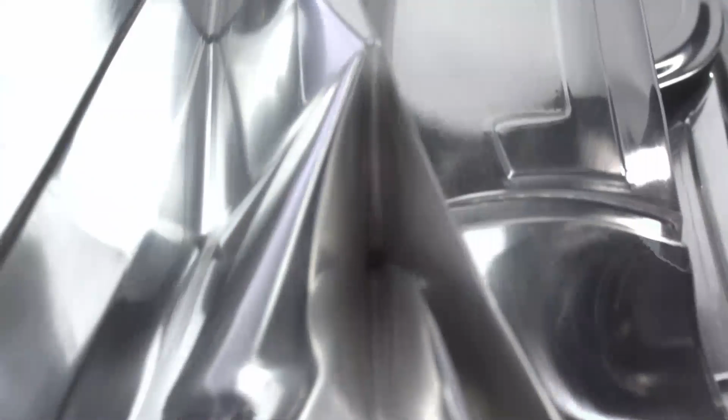So why PowerMill? Why PowerMill over everything else? Dedicated, expert, and trusted. It is a dedicated CAM system, it is not a CAD system built into it, it is specifically designed to do CAM. It has been around for more than 20 years, and it is industry recognized as one of the solutions to produce fantastic quality parts.

So what can we do with PowerMill? The first thing, high-speed roughing operations. I'm going to show you through this a little bit later on. But one of the most interesting aspects of this is called vortex roughing. This aims to basically keep a constant load on the tool, allowing us to increase tool life while reducing cycle times. Really, really interesting piece of kit. I'm going to give you a bit of a demonstration of that later on.

Can also do 2D milling, which covers feature detection again, which I will demonstrate later on, drilling, pocketing, and chamfering. So we really have a wide range of 2D milling operations.

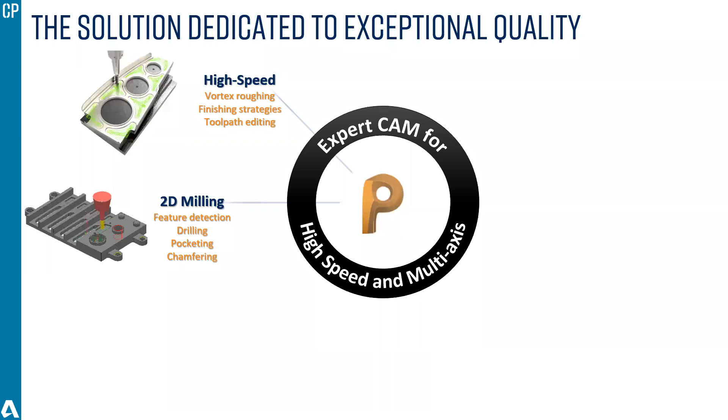On top of that, we have 3+2 machining. Very, very useful for reducing tool push off, just a full utilization of a full 5-axis machine.

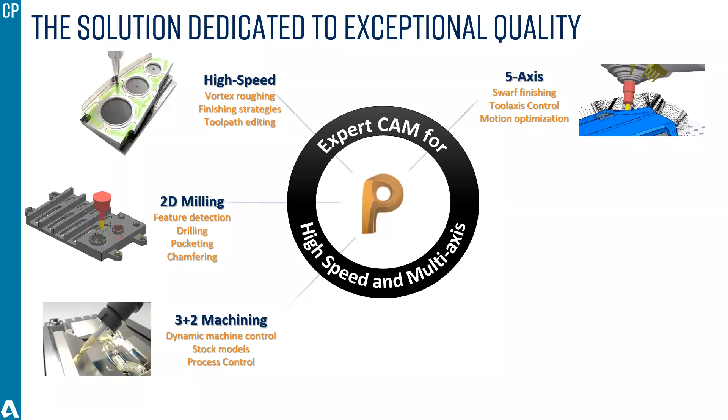We also have full 5-axis simultaneous commands, including swarf finishing. We also have tool axis control, which is a really, really interesting part of the system. It actually allows us to dynamically change the orientation of the tool to prevent any clashes, etc.

Mill turn, we're going to leave that one for today. We do have the ability to do mill turn within PowerMill, but as I said, for today we're going to focus just on the milling.

And also robotics. So we have the ability to program a wide variety of robots, a really, really interesting part of the system. Again, for today, we're just going to focus on milling, but if you'd like any more information on that, I'd be more than happy to walk you through it.

So what impact does PowerMill have? Improved quality. This is, I'd say, the main focus of PowerMill, producing high quality parts to really tight tolerances. We do this in a number of ways by having a large number of finishing strategies, which allows us to not have the need to do manual polishing after the fact. Also allows us to meet delivery schedules by allowing efficient programming of parts and improve throughput, maximizing capacity.

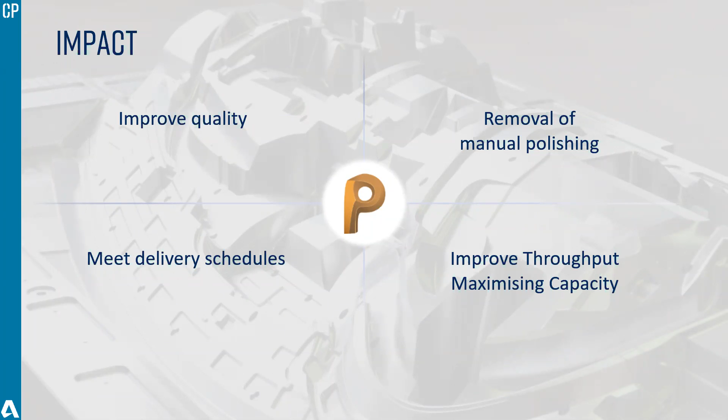Expert levels of control and optimization. Okay, so we touched on this a little bit before. Increased precision, as I said, we'll give you a good demonstration of what that means later on. Excellent surface finish again. Greater efficiency is really about creating an incredibly efficient program very quickly.

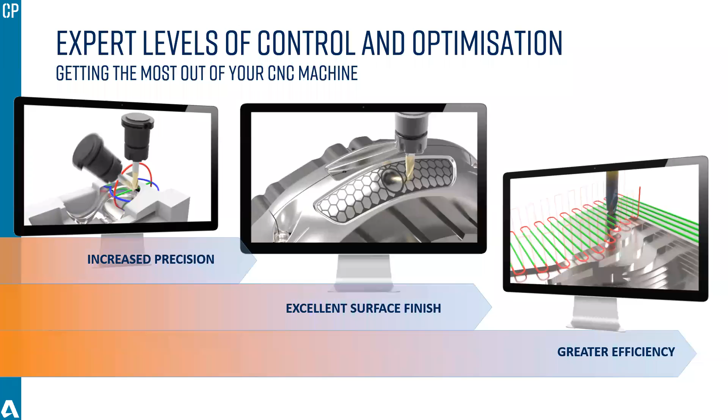So again, we come back to impact. Greater control and flexibility to reduce the cycle times, repeatability and standardization. So this is something that allows us to automate repetitive tasks. So an example of this would be our tool library. So instead of creating tools on every occasion, we can simply create a library and import them as necessary.

Maximize return on investment of CNC machinery. Again, this really comes back to getting the very most out of the machinery that you have by using an efficient CAM system. Trusted to deliver. Now, as I said, PowerMill has been around for more than 20 years. It is an industry-proven piece of software.

So how do we produce these efficient results? Well, one is by stock simulation. So what this allows us to do is to produce accurate representations of machine stock at any point in the machining process, simulate the effects of feed, speed, tool geometry, and the number of teeth on your machine parts, identify hazardous machine motion that could degrade surface finish, and highlight regions of stock where additional machining needs to take place.

Okay, so I'll give you a bit of a demonstration of that last one a little bit later on, where we can actually take a model that we've already machined and run assessment on it to see if there are any gouges on the model or potentially if there's any material left over.

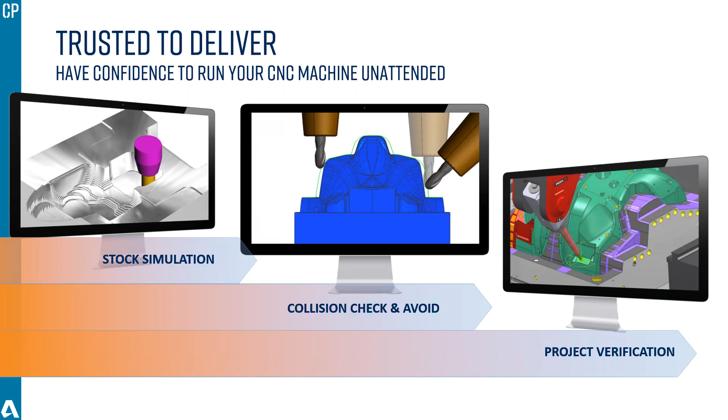So what are the benefits of using PowerMill? Well, increased confidence. So we touched on that in the last slide. The PowerMill verification tool to confirm toolpath and NC program are safe to use. Major problems can be identified and fixed early in the programming process, ensuring that programs are ready for use on your 3 or 5-axis machines.

In many cases, programs are of such high quality that they can just be run on the machine unattended. Okay, so this basically involves you can start the machine when you go home at night, run it overnight, and when you come back, the part's finished in the morning.

So what does this lead us to? Well, better use of our workforce. Machine operators are not stood watching the machine. While one part is being machined, they can be programming the next one. The workforce can also supervise multiple machines or redeploy to focus on other tasks. Leaving the CNC machine doing what it does best, producing great parts. Feeding a machine with high quality NC programs ensures that you always produce the best quality parts.

Protecting hardware investment. Now, I'm sure this is the one that everyone is pretty keen to talk about. Obviously, modern CNC machines are incredibly complex and expensive pieces of equipment. A single machine collision can run into thousands of dollars worth of downtime and repair bills. So it's really important that every program that we send out to the machine, we know is going to produce exactly that part without problems.

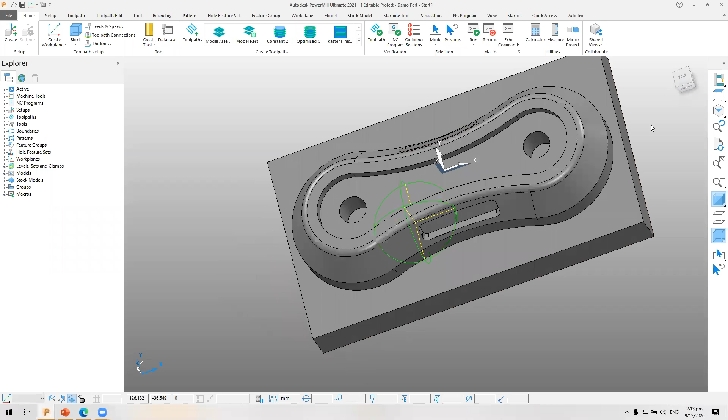Okay, so to start with, just a very quick overview of where everything is in the system. Obviously in the center we have our part window, which we can manipulate around. So we can hold our middle mouse button and drag anything around that we want. Over on the right hand side, we also have a number of shortcuts. This is usually used to manipulate the view and what we see on the screen.

Over on the left hand side, we have our Explorer. Now this is going to be where all of our NC code, all of our toolpaths and all of our tools that we've created are going to be listed. Obviously, we haven't got a lot in here at the moment because we haven't started. And up at the top is our taskbar. So this is where we access all the different features of PowerMill. If I can get that to go away again.

Okay, so the first step whenever we open up a new part in PowerMill is always to produce our stock. So I'm going to come up here and select block. Now this allows me to do a number of different things. So first of all, I could physically go in here and input the figures that I want for my stock. Not a problem at all.

But what I can actually do is I can hit calculate. And what it's then going to do is it's going to shrink that stock down to be the same size as our part. So at the moment, this is shrink wrapped exactly the size. So I'm going to come in here and I'm going to say add 2 millimeters on in the Z, just so that we've got something we can come in and face off. When I'm happy with that, close it down.

The next thing I'm going to do is come into my Toolpath Connections tab. Now this allows me to set up my clearance planes. So again, with PowerMill, the process is always the same. We create the stock, then we set up our safety planes before we do anything else. At the moment, by default, the system gives us a rapid clearance of 10 millimeters and a plunge clearance of 5. Now you can come in here and change this if you want, but for the moment, I'm just going to hit calculate.

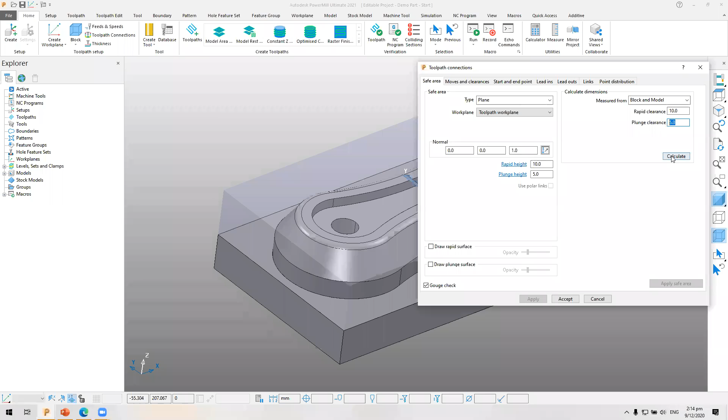I can then also turn on a visual representation, so I can actually see where those planes are going to be above the parts and make sure they're in the correct place. Once I'm happy with that, turn both of those off and close this down.

Okay, so what's next? Well, before I can produce any toolpaths, I'm going to have to create a tool. Now, there are a number of different ways of doing this. I can, if needs be, just come into here and create a tool from scratch, so literally input the dimensions as we go. But what we encourage people to do within PowerMill instead is to use our tool database. So I'm just going to click into here, let this load. Oh, and it's loaded on the other screen. Let me just drag this across.

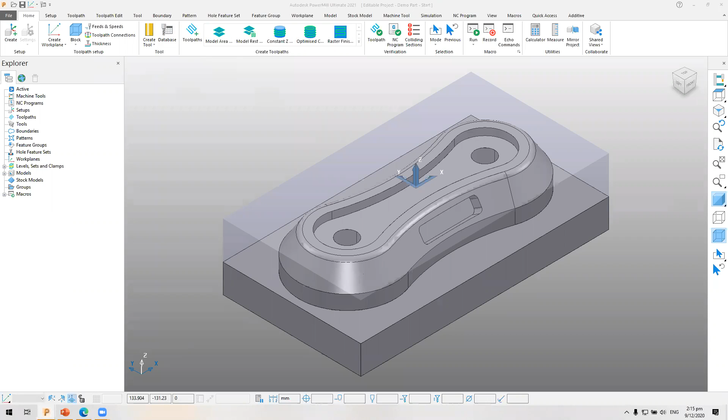So this is PowerMill's tool database. Now by default, I'm using just a generic tool group. So this is just something that ships with every version of PowerMill, and it's just a set of standard tools. But what you can do, and what I would certainly encourage, is for you to actually create your own tool libraries based on what you have in each machine.

So we're not limited to just one tool library. We can have a different tool library for each machine that we have in the shop, and it's really easy just to switch between them, so we always know what tools we have available to us.

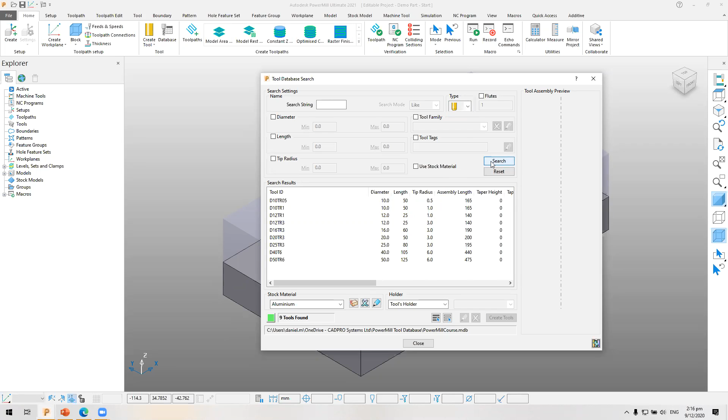So down here, we can see all of the different tools that are in this database currently. And up at the top here, we can see the section for type. So I can actually filter the database by the different types of tool. So I'm going to select tip radius tools, hit search, and then the system displays all of the different tip radius tools that we currently have in our library.

So I'm going to select the biggest tool to start with, a 50 mil, just to try and get rid of as much material as we can. Hit create tools. And now I'm going to close that down. And we can see that tool's been created there.

So the next thing I'm going to do, now I've got a tool, is I'm going to need to create a new toolpath. So again, up here on my taskbar, I'm going to select toolpaths. It's always going to put it on the other screen. And that displays our strategy selector.

So we see a similar form here to what we see with our Explorer over on the left-hand side. We have a number of different groups of strategies. Okay, so we have, for example, 3D area clearance, curve machining, feature machining, or we can click through these and it shows all of the different strategies that we can employ. We do also have a search bar if needs be.

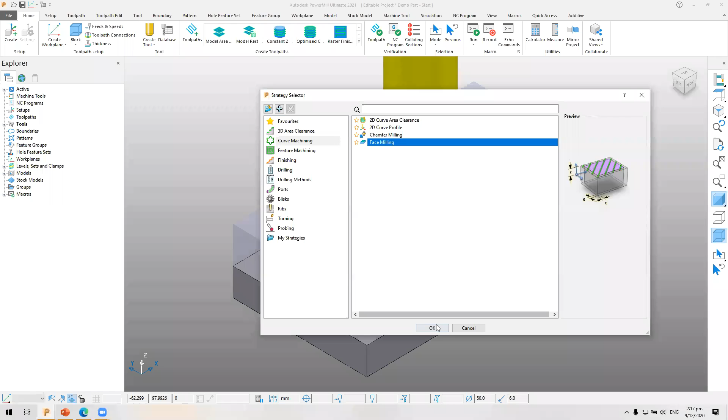As I mentioned earlier on, PowerMill has a huge array of different strategies that we can employ. So it's a really slick way of putting things into categories and makes it easier for us to find our way around. So what I'm going to do to start with, I'm going to select curve machining, and I'm going to pick this face milling operation. Press OK. Always on the other screen.

And now we get our toolpath window come up. So again, similar form to what we've already seen. Over on the left-hand side, we have an Explorer with different options that we can go through. And over on the right-hand side, we see whatever option we have selected in the Explorer, all the different options displayed there. So if I click through, you can see all the different options are displaying.

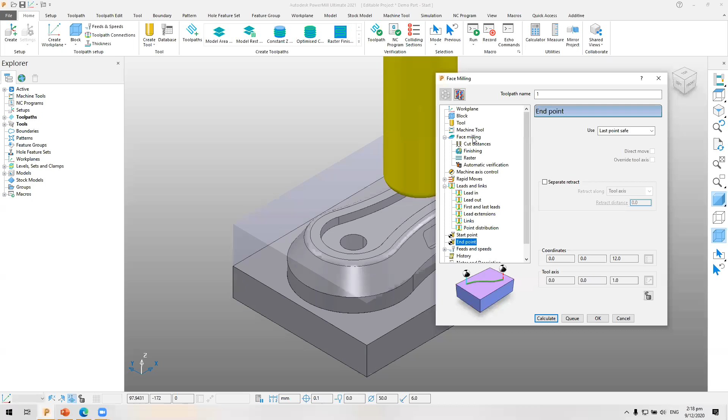Also up at the top here, we have the option to give this a toolpath name, which I thoroughly recommend and honestly very frequently forget to do. With simple parts, it's not so important, but when you get to very large, complex components, it makes life much easier if you've gone through and named everything. If you have the toolpaths named 1, 2, 3, 4, 5, 6, if you ever want to come back to it, it does become really difficult. So I'm going to name this top face.

Now we have the option here to pick where our face is going to be located. Now we've currently got it at 0, which is actually where our coordinate system is, as it's located on the top of the model, so that's okay. And I'm just going to come in here and change my step over to say 20 mil and press calculate. Close this down. So there we go. We have our first operation.

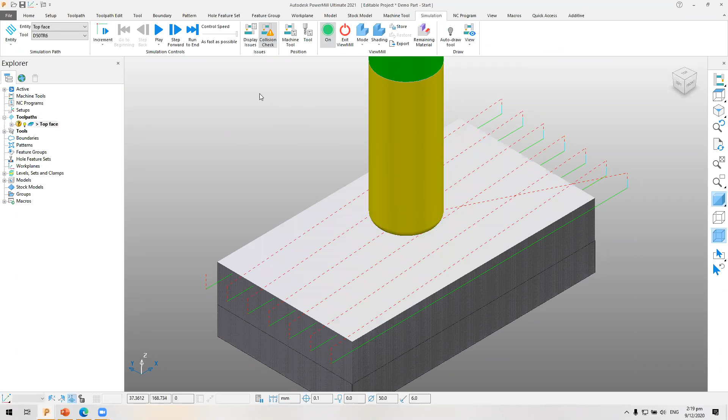So now that we've got our first op, what we want to do is simulate that. So under here on the toolpath, we can see the operation that we've just created. If I right click on there, press simulate from start, and the system then takes us into our simulation workspace. First thing I'm going to do is I'm going to turn on my ViewMill, which will allow us to see the stock that we've created. Now I'm going to just slow this down a little bit so we can see it. Press play, and there's our first operation.

So once I'm happy with that, I'm going to come up here to the taskbar. I'm going to press store. So what this allows us to do is literally save the simulation in its current state, so that when we produce additional operations, we don't have to watch through the ones that we've created every time. We can simply just come back to this point.

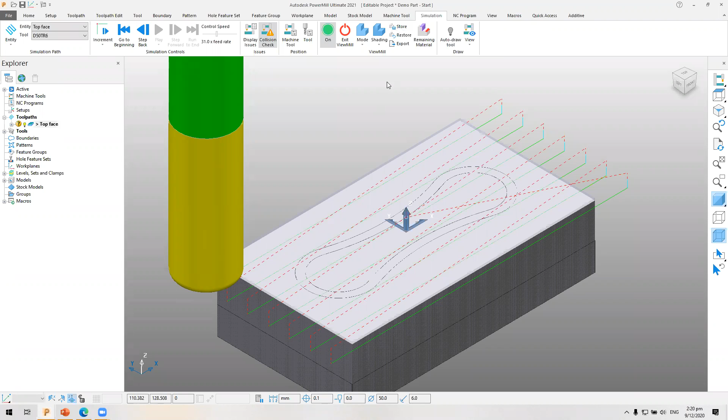I'm now going to say mode and select no image. So that's basically just going to hide away our stock so that we can see more clearly the next operation that we're trying to produce. So I'm just going to hide this toolpath away. It's not a necessary step. You can leave everything on the screen. It just makes life a little bit easier for us to see what we're doing.

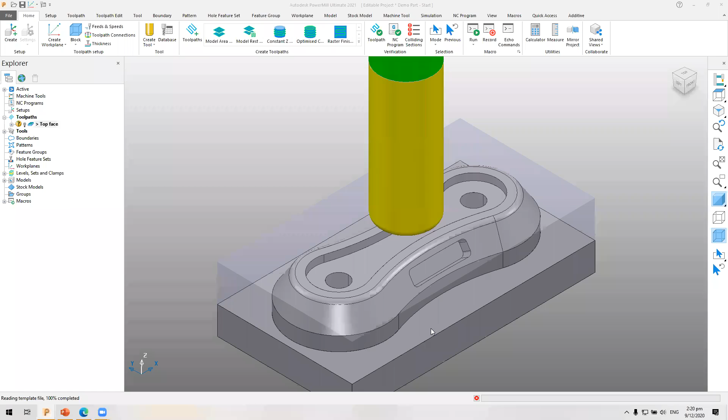So now it's time, next operation. So I'm going to come back to my home tab, select new toolpath. Again, I'm going to come into my 3D area clearance, and I'm going to select model area clearance. This is our standard kind of roughing operation, if you will. Press OK on that. Again, first thing I'm doing here, come in here and give this a name. So we'll call it

outside rough. We've got a number of different styles of roughing that we can do in here. So for the moment, I'm going to select offset model. Vortex I discussed very briefly earlier on, which is a high-speed milling operation, which I'll show you in a second. For the moment, though, I'm just going to select offset model.

I'm also going to leave a thickness on. Now, what this does, this is essentially stock to leave. So what I'm going to do is I'm going to leave 1 millimeter of stock on the walls, and I'm just going to finish the floors to depth. I'm being just a little bit crude just for the sake of speed in this one. Step over, I'm going to leave it 20 mil, and step down, I'm going to change that to 10. Now before I do this, I'm just going to come in here to my limits tab.

I'm just going to change a couple of things in here. So the first thing I want to show you in here is this block command. So by default, the tool is currently set so the center of the tool will never pass outside of the stock. But to get around this edge here, we're going to need it to drive around the outside. So I'm going to switch that.

I'm also going to set some Z limits here. So what I can do is I can actually specify between 2 points in Z where I want to machine between. I can input the figures if needs be, but a much slicker way of doing it is to actually select this icon here. And now I can actually pick that directly off the model. Do the same with my lower limit and press calculate.

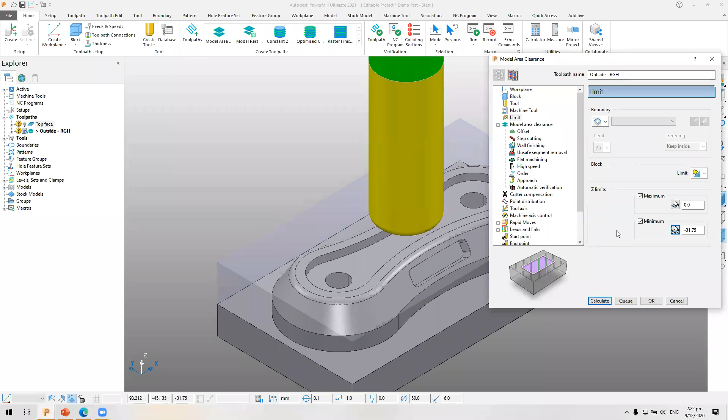Okay, so there we have our first roughing operation. So I'm just going to simulate that. So right click on the operation, simulate from start, turn my stock back on. I'll just speed this up a little bit and press play. Okay. So that looks pretty good.

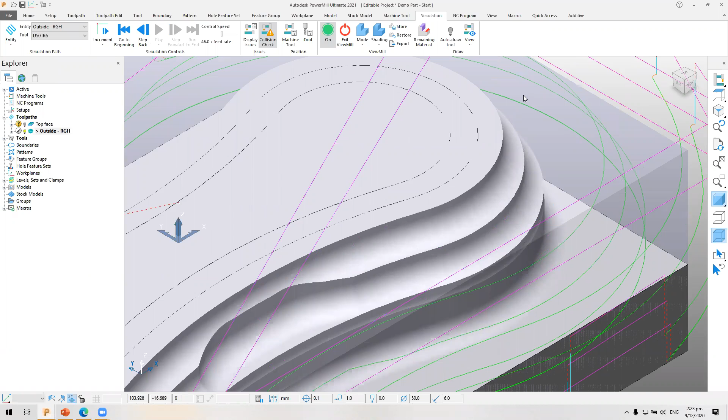One thing I do notice though is that we are leaving some fairly big scallops on these walls here. So before I come in and finish this, I'm really going to need to clean these up. So there's a number of different ways I could do this. I could produce another operation, essentially a semi-finishing op, in order to come in here and remove some of this material. But what I can actually do within PowerMill is actually build that logic into my roughing operation.

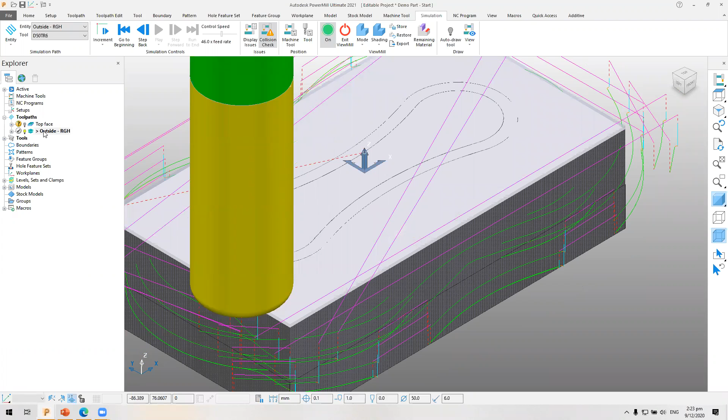So what I'm going to do, I'm going to hit restore. That's going to take my simulation back to the state it was before we ran this operation. And now I'm going to come back into this operation, press settings. Notice I don't have to leave my simulation workspace for this. I can edit everything on the fly. Going to let that load.

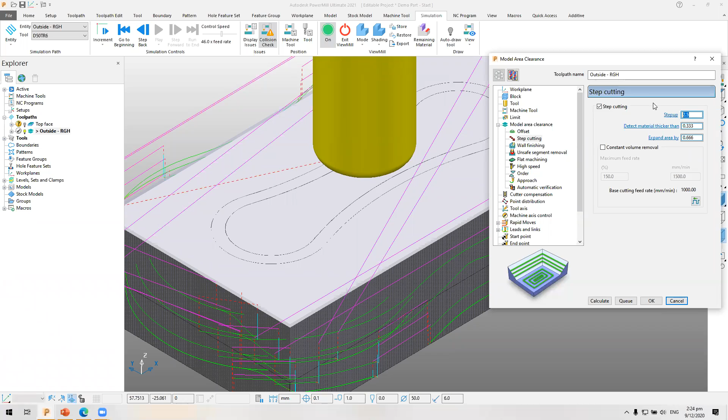And now under step cutting, I'm going to enable this. And what this is going to do is it's going to actually assess the model, and if needs be, it will then add additional passes in at the figure that we've specified, currently 2.5 mil, which is just going to help us to reduce those scallops. So essentially, we're going to be doing a roughing and a semi-finishing operation all in one here. Press calculate.

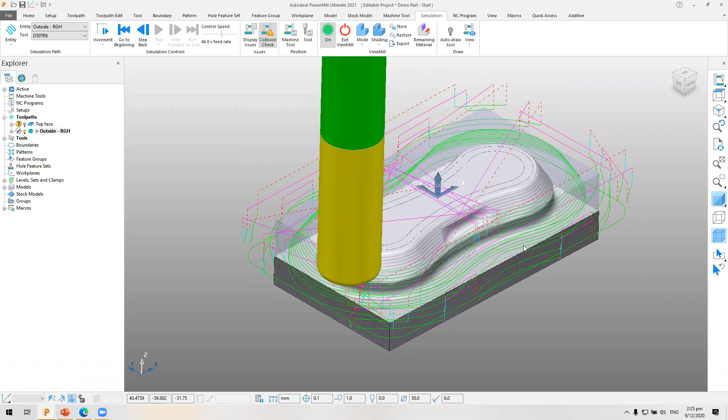Close that down. In fact, let me just hide this away just so you can see those. So you can see the cuts that we've added in here. Again, if we now just simulate that. So particularly if you have extremely complex models with lots of angled faces, this can be a huge time saver for the programmer. Okay, so I'm pretty happy with that. So I'm going to hit store there. Minimize this again.

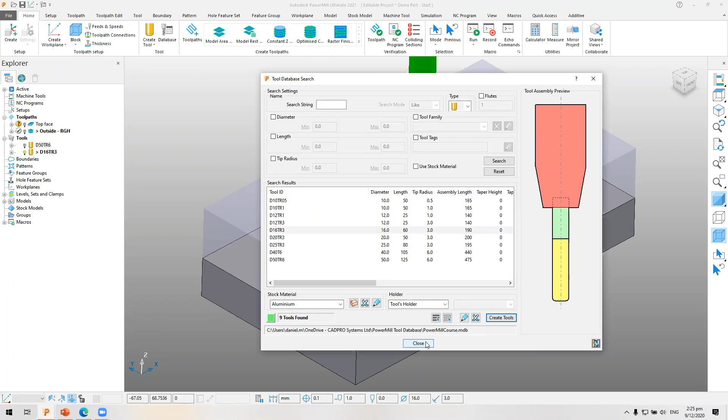And I'm actually going to hide everything away now just so we can see our model again, just to make life easier for ourselves. So the next thing I'm going to do is produce an operation to rough out this top pocket up here. So the first thing I'm going to have to do is create a new tool, because at the moment our 50mm tool isn't going to fit through this slot here. So again, I come back to my home tab, go back into my tool database, and now I'm going to select, say, a 16mm tool. Hit create, we'll import that into PowerMill. Okay, so we're ready to go.

So the next thing I want to show you with this is our feature recognition. So if I come up here in the feature group, I can actually say detect. So instead of actually just defining boundaries, picking off the model what it is that we want to machine, we can actually let the system do a lot of that work for us. So now I'm in feature recognition mode. If I hover my cursor over the part, we can actually see all of the different features that PowerMill is finding. So I'm going to select that top pocket, hit accept, and we've now defined that pocket as a feature.

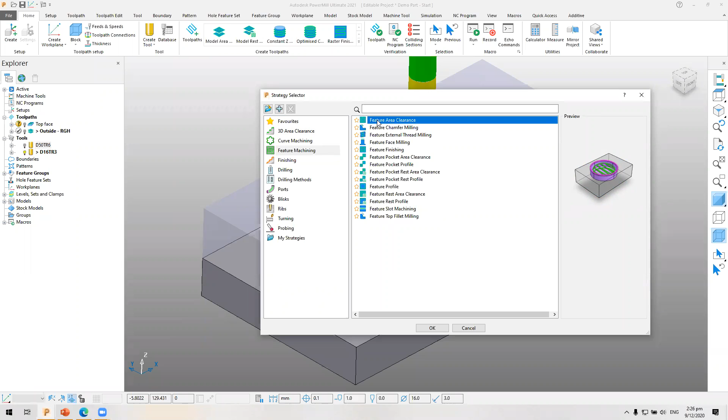Come back to my home tab, create another new toolpath. This time I'm going to select my feature machining operation, feature area clearance. So this is really similar to the operation that we've just produced. It's just that it's designed to work with whatever features we've created instead of assessing the model. Press OK.

Okay. So again, as you may well realize, very similar form to what we saw before. But now what I want to show you is our vortex roughing. So this is PowerMill's high-speed roughing operation. The aim of this is to maintain a constant load on the tool. So the advantages of this are reduced cycle times, and because we're always maintaining a constant load on the tool, we usually see dramatically increased tool life as well.

So a really, really useful tool. So I just want to give you a quick demonstration of that. So I'm going to leave most of these things the same. I'm going to leave my 1mm on the wall. Again, we'll come back and clean that up later on. But this time, 20mm step over with a 16mm tool is a little bit extreme. So we're going to put that to 8, so a 50% step over. Give this a name, call it top pocket.

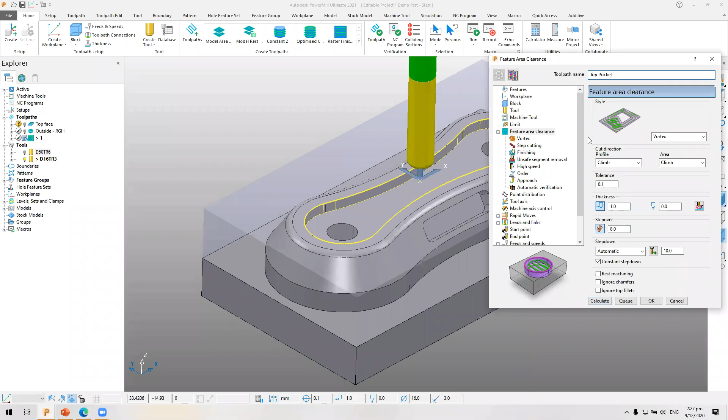Hit calculate. And there we have our high-speed roughing operation. So again, a very different form to what we saw before. Just want to show you what that looks like. Simulate that from start. Just slow this down a bit so we can actually see what it's doing. Okay, so a really, really efficient roughing strategy. Once I'm happy with that, store it again. Minimize my stock. Help if I press the right button.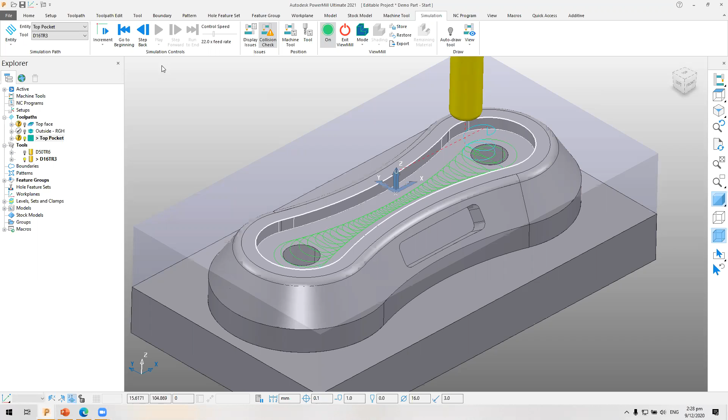There we go. Okay, so now I want to look just very briefly at some of the 5-axis simultaneous operations that we can produce within PowerMill. As I said at the start, PowerMill is really good at producing very high quality, very complex parts. So its strength really lies in its 3D and its 5-axis operations and the ease with which they are created. So I just want to show you through that very quickly. So I come back to my Home tab again, another new toolpath. This time I'm going to select Finishing.

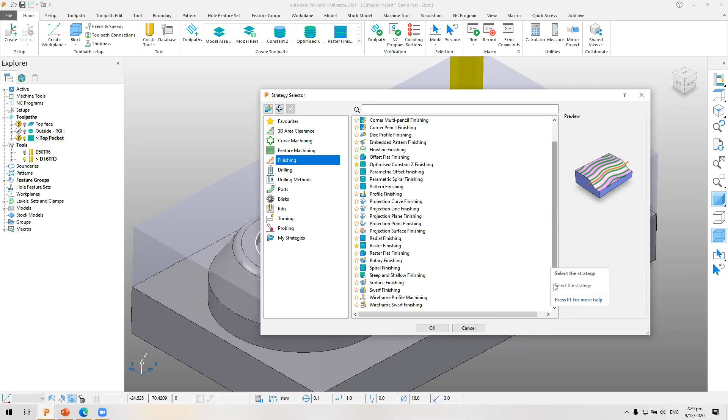So you see, just to give you a quick idea, the number of different finishing strategies in PowerMill is immense. There are a huge number of options, and all of it is aimed at giving you as much control over the toolpath as possible. So what I'm going to do, I'm going to come down to the bottom. I'm going to select Swarf Finishing. Press OK. Okay, again, first thing I'm going to do, give this a name. And I'm actually going to do very little in here before I start.

All I'm going to do is I'm going to increase my tolerance. So what this will do is this allows the tool to essentially follow the surface more accurately. It will never deviate more than 0.01 mil away from the surface. So for roughing, I usually use a tolerance of 0.1. For finishing, 0.01 or even down to a micron in some cases. But all I need to do to produce this operation is actually pick the surfaces that I want to machine off the model, press calculate, and there we have our swarf milling operation.

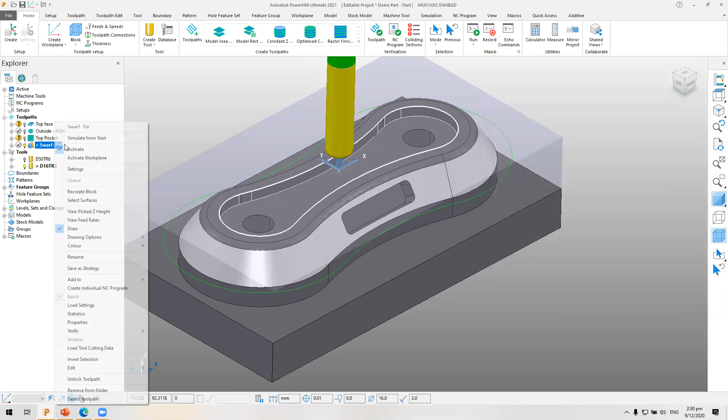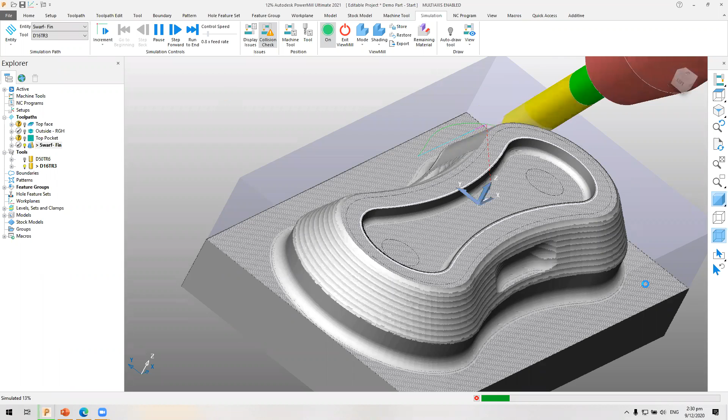So I'm just going to run that through very quickly. So again, we'll simulate that from start. I'm just going to slow this right down so that we can see what it's doing. Okay, so I can see a bit of an issue that we've got straight away. We're actually plunging the tool through material on the edge here, so we need to adjust that. Just speed this up a little bit, or we'll be here all day. Okay, so we need to do a little bit of work on our lead in, lead out. So that's obviously not an ideal situation.

Also, if I bring on a side view, you can actually see that we're going to potentially leave a little bit of material at this bottom edge here. Because by default, what the system will do is it will drive the very bottom edge of this tool down to the bottom edge of here. So there's potential for us to leave a little cusp there. So what we could really do is offset that toolpath slightly just to make sure we don't leave any marks there. So again, I'm going to hit restore. Come back to my isometric view just to allow us to see what we're doing a little bit more easily.

So now I can come back into this operation and make a couple of changes here. So I'm a big advocate for just get something on the screen. PowerMill is very, very quick at recalculating toolpaths. So don't be afraid to just get something on the screen, have a look at it, and then come back and make any changes if necessary.

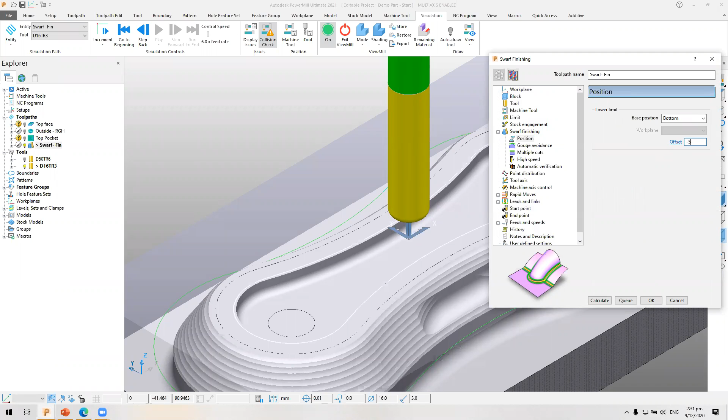So the first thing I'm going to do, I'm going to unlock this toolpath. I'm going to come down here to my position tab. And this allows us to actually offset the toolpath. So what I'm going to do is I'm going to put in a figure here of say -5. If I switch to a side view again, just so we can see what's happening. If I now press calculate, that toolpath will now have actually been offset down this face by 5mm. So that will eliminate us potentially leaving a mark at this bottom corner.

Next thing I'm going to do is come here to leads and links. I'll select lead in to start with. The first choice, I'll select surface normal arc. We'll have a linear move, say with a 16mm tool, we'll make the linear move about 8mm, a 90-degree angle, and a radius of 8.

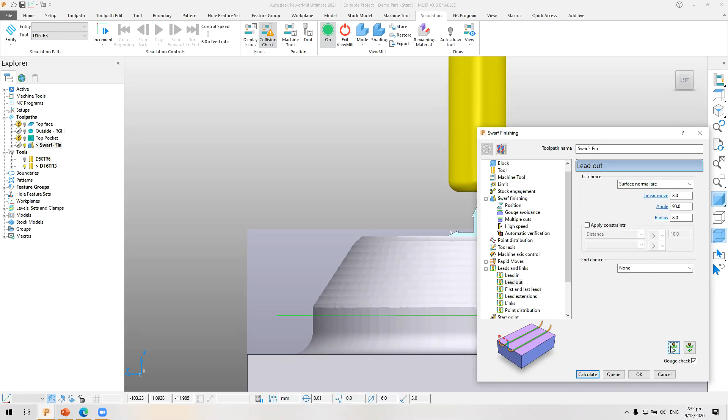For lead out, we could input the same values again, or instead just copy our lead in to our lead out. Then switch back to isometric view, press calculate, close that down. So we can see the lead and link has had the lead in and lead out added. Let's simulate that.

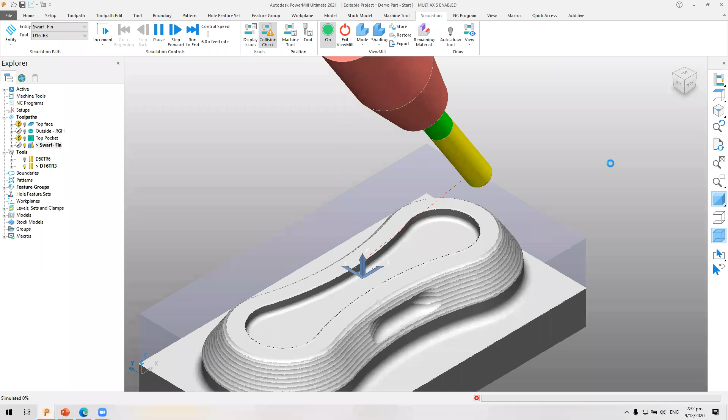Much better. Hopefully that's giving you a bit of an idea of just how easy it is to produce these kind of toolpaths within PowerMill. As I said, this is really a big strength of the system.

Once I'm happy with that, store it away and minimize everything. Let's get rid of this toolpath and this tool so we can see what we're doing. The next thing I'm going to do is produce a 3D operation to create this top fillet around here.

This time I'm going to need to create a new tool again, so back to the home tab, tool database. Instead of a tip radius tool, I'm going to select a ball mill, searching our library for that. Select our 6mm ball nose, create that tool, and close it down again.

Now I'm going to create a boundary. This is going to limit the toolpath to just machining these surfaces here. I'll come up to the boundary tab, create a boundary by the selected surfaces, pick the two surfaces, press apply, and there's our boundary created. Press accept to close that down, and now we're ready to produce this operation.

Back to the home tab again, another new toolpath. This time, sticking with our finishing operations, I'll select optimized constant Z finishing. Just let that load. Come in here and give this toolpath a name, we'll just call this one fillet.

So what am I going to need to do here? Firstly, I'm going to change this step over. 8mm step over with a 6mm tool isn't going to be so good for us, so I'll set this to 0.5 mil instead. I'm also going to turn on spiral, which will produce this fillet without retracting the tool, just spiraling down continuously.

This is very good for minimizing any witness marks that we might leave on the part as the tool comes on and off. Hit calculate, and there's our filleting operation. Really, really easy to produce.

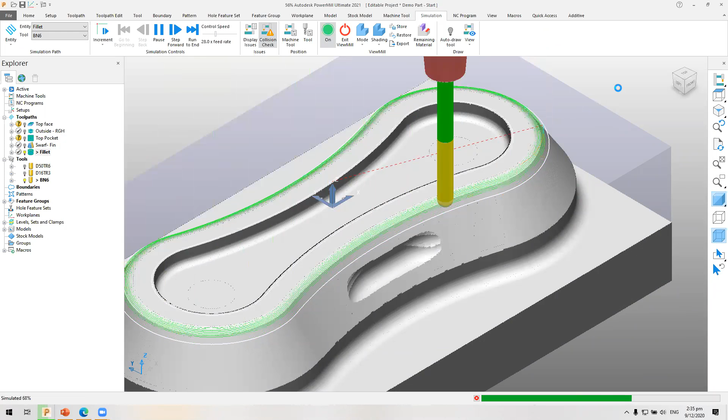Just run that through on the simulation, make sure we're happy with everything. If I hide that toolpath away, we can get a better idea of what we've actually produced. That's looking pretty good.

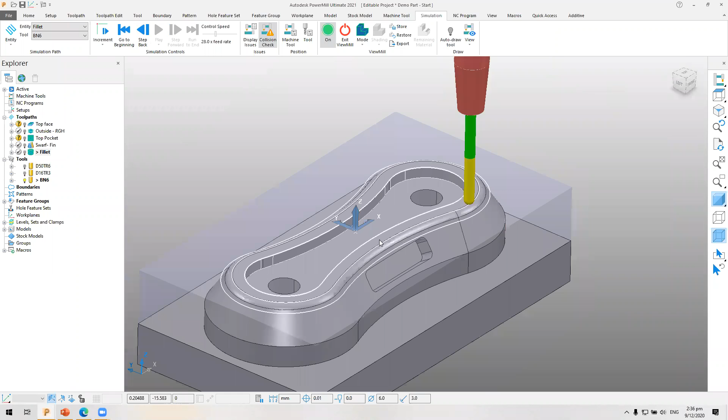Once we're happy with that, store it, put it away, and now we're ready for the next operation. The next thing I want to show you is just a little bit of drilling. We've got these two holes here, and if we look down at them, we've got a flat bottom in them.

I don't know the diameter at the moment, so I'm going to come up to my home tab and select measure. This allows me to dynamically interrogate the model and extract information from it. I'm going to select diameter, and now anything I hover over, it's going to show me what the diameter is.

Okay, so it's an 18mm hole. Close that down. I'm going to need to produce some more tools here. Again, we'll come back to our tool database.

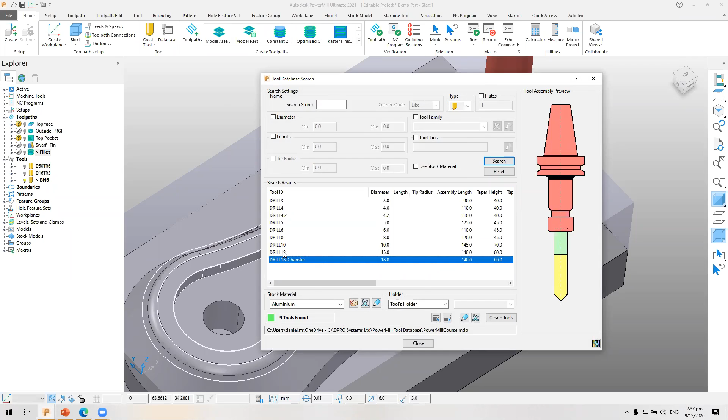This time I'm going to look and pick a drill. Search the database. Okay, so what have we got? We've got an 18mm chamfer drill, and a 12mm as well. I'm going to pick both of those, so we can extract multiple tools from the database in one go. With both selected, I'll hit Create Tools. You may notice on the left-hand side that both have been created.

The last thing I need is an end mill as well, just to come in here and produce this flat bottom. So this time I'll pick end mill, search, and we'll go with a 10mm end mill.

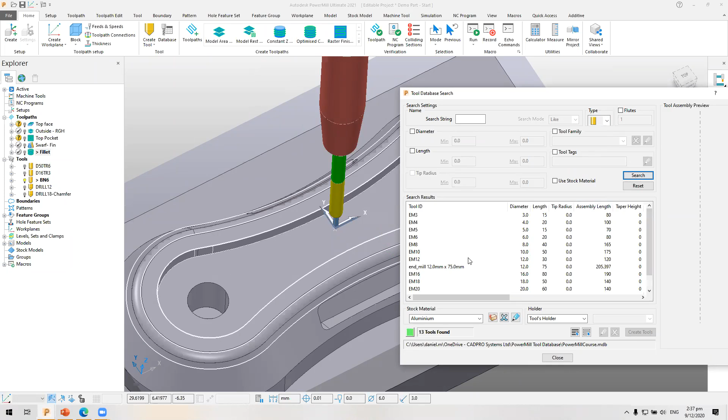Before we get started, I'm going to define these as a feature. Similar trick to what we pulled with the top pocket. This makes our life a lot easier. We don't have to mess around with defining depths because the system can pull all that information directly from the model. So under hole feature set, I can pick.

I've selected both of those holes. I can now press create, give these a name. As this is going to be the only one we produce, I'm not going to bother in this instance. Hit apply. We can now see those have turned yellow, meaning they're defined as a feature.

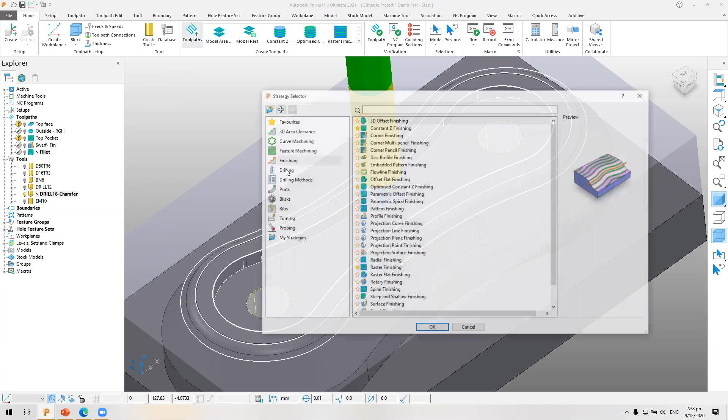So now I'm ready to go. Back to my home tab again, new toolpath. This time I'm going to select drilling, just the standard drilling operation to start with.

What I'm going to do here is produce 3 operations. The first uses my 18mm drill, just to spot these holes. Then I'll drill them to depth using the 12mm, and then come in with a helical operation to produce that flat bottom with our end mill.

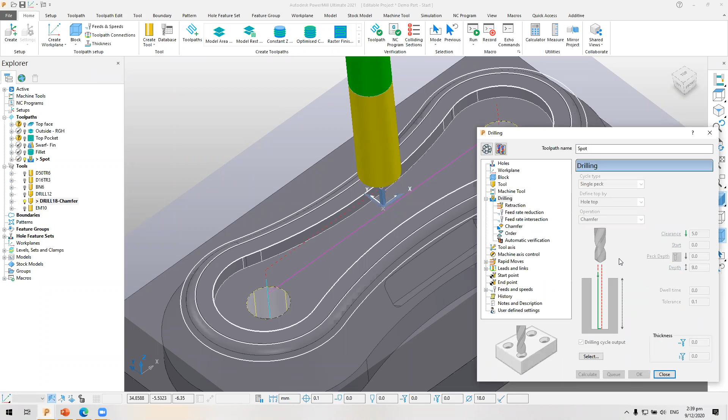First thing, give this a name, we'll call it spot. Under operation type, by default it's drill the hole to depth. What I'm going to do instead is select chamfer, hit calculate. That's all I need to do. The system has pulled all the dimensions from this hole directly off the model, so we don't need to define any depth. It figures it all out in the background for us.

So we can see it's actually produced our spotting operation. I'm going to, just for the sake of speed, produce all these operations, and then we'll simulate them at the end.

The next operation is pretty similar to the one we already have. Instead of closing this down and going through all that rigmarole, I'm going to select this button at the top here, which gives me a copy of the toolpath I've already created. In our Explorer, we now have spot, the operation we just created, and spot_1, an exact copy of our original toolpath.

So what I can do now is come in here, change the name to drill, change our tool as well, because we're currently on the 18mm drill, change that to 12, change my operation style to drill hole to depth, calculate that, and we can now see that drives the 12mm drill right to the bottom of that hole.

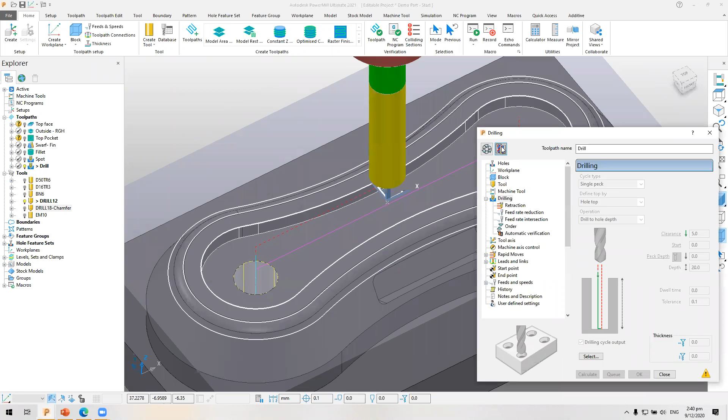Lastly, to produce our helical operation, we can pull exactly the same trick again. Give me another copy. This time I'll call it helical, change the tool again, this time pick our end mill. Then under our cycle type, I'll select helical.

As you can see, it's really easy to produce a lot of similar operations in a very short space of time. We're not starting from scratch, we can use a lot of what we've already produced. I'm just going to hit calculate on that. Let's see what we get, then make any adjustments if necessary.

That's probably the pitch on that, probably a little bit extreme, so I'm just going to come in here and modify that. We'll put that on, say, 52mm pitch, maybe not, make that 5mm. And there we go. Now I'm happy with all those. Close this down.

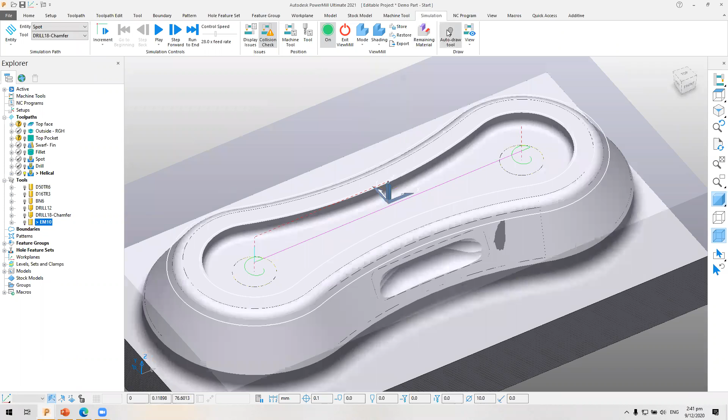And we can simulate all of these operations. Let me just show the right tool. You can play that. There's our spot drilling operation. Next, we're going to drill the holes to depth. And then finally, our helical operation just to come in here and clean up that material at the bottom.

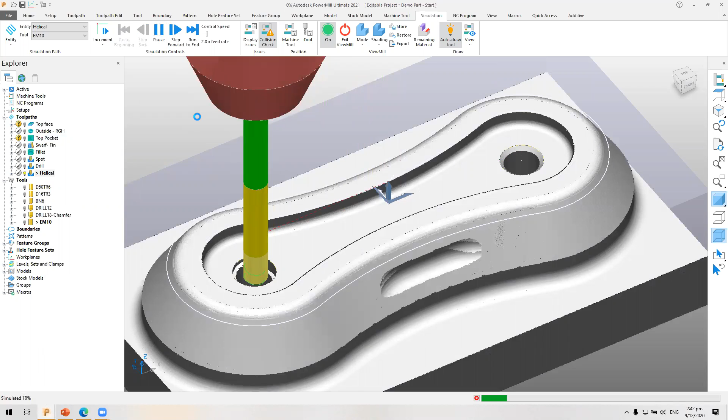Okay, so that completes our drilling. So I've got a couple of things left to do on this model right now. We've still got to clean up the 1 millimeter that we left on the walls here, and we also have to produce this pocket on the side here.

So what I'm actually going to do is hit remaining material. This is going to go off and assess the model and see where there's any material left. So purple indicates there's a large amount of material left, which is what we'd expect. We can get a visual representation of where there's material left and where the part is completed.

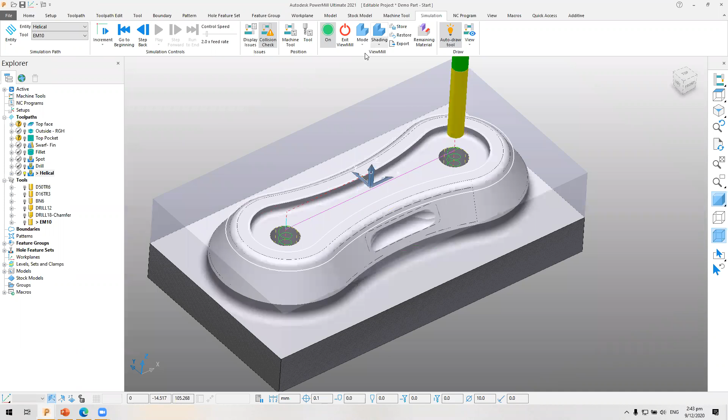Close that down. Store that away. Minimize everything, and let's get everything off the screen so we can see what we're doing. Okay, so next I'm going to produce an operation to come in here and clean up this 1 millimeter on the walls here. There's a number of different ways we could do this.

We could produce an operation for each instance. What I mean by that is we could produce an operation to come in here and clean up this bottom surface, then another operation to come in and do the top. No problem with doing that, it certainly would work.

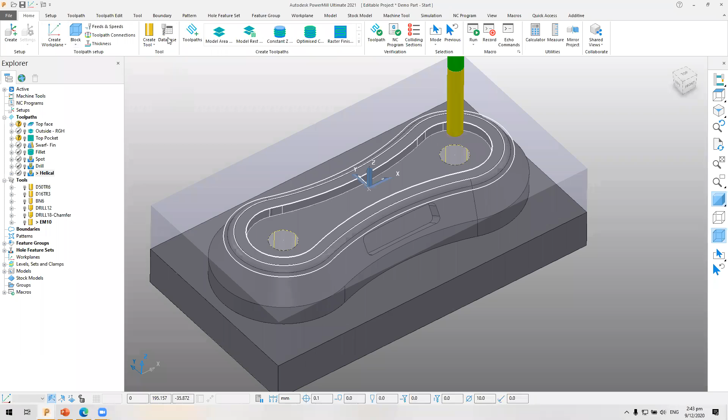But what we can actually do is use PowerMill's built-in intelligence to do a lot of the work for us. So I'm going to come back to my home tab again, pick up another new tool, I'm going to pick, say, a 16 mil end mill, just so we can really plow through this material. We'll create that tool and close that one down.

And now I'm going to create another new tool path. So again, I'm going back to our finishing, and I'm going to select corner pencil finishing. Now what this does is it will actually assess the model, find where there's material left, and produce the operation to remove that material.

Okay, so we'll give this one a name again, call it corner cleanup. As I said, this is a really automated operation, so there really is very little that we need to do in here. So if I just hit calculate, we get significantly less toolpath than I was expecting.

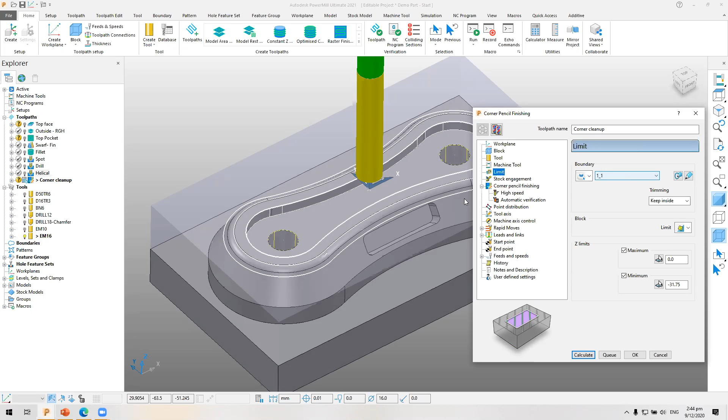Okay, I suspect we have possibly a limit set over from a previous operation. I just come into my limit tab here, let me just check. So we have our boundary selected that we had to produce this top fillet here. It's been lingering around, so I switch that back to none. Hit calculate again.

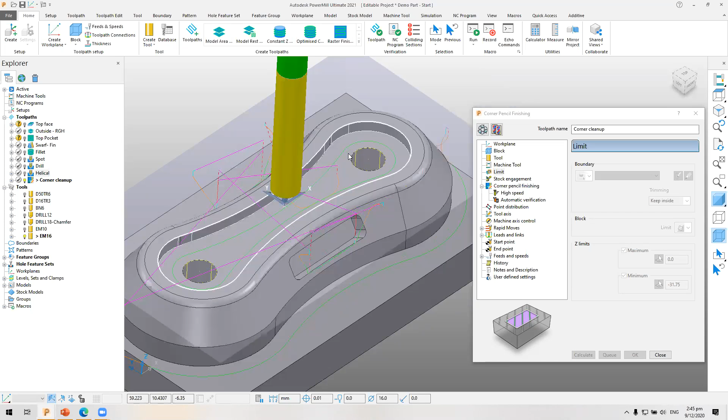And there we go. Okay, so I can see we've produced the operation to clean up that bottom surface and at the top. I can also see a few issues we're having here though. First of all, we're not driving the tool outside of the block, so that's going to be an issue we need to correct. Let's do that first of all.

So again, under our limit tab, I'm going to switch it to be able to go outside of the block. Press calculate. There we go, that's corrected that issue.

The other issue I can see as well is that the system, quite correctly of course, has picked up that there's material left in these pockets here, which we haven't produced yet, which is of course true, but it's really not what we want to be doing with this operation.

Now, one of the, for me, the most impressive things about PowerMill is the ability to actually manipulate toolpaths after you've created them. So what do I mean by that? Well, this toolpath, we just don't want it. We want these sections here. Ooh, if I can pick them. Oh, it's not playing ball. We want the ones at the bottom and at the top, but this we just want to get rid of.

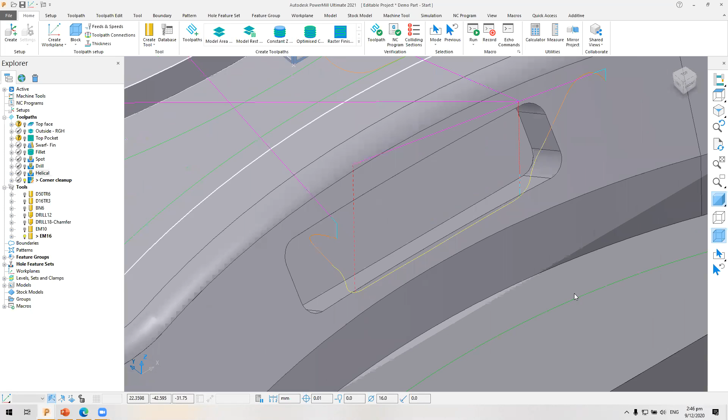So what I'm actually going to do is just select them. I can select all parts of the toolpath that I do not want. I can now come up to my toolpath edit tab, and I can just get rid of them. The system in the background then retrims all of the moves for us. Do the same on the other side - pick what I don't want, delete it, and that operation is now correct.

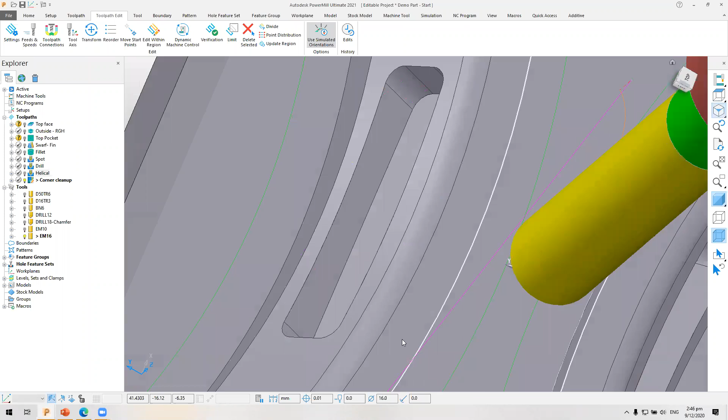So really, really powerful tool. If ever there's a situation where the toolpath is just not exactly what you wanted, you have an awful lot of control in PowerMill to be able to manipulate that without having to recalculate everything. So again, let's just run that through on the simulation.

Speed that up a little bit, or we'll be here all day. Oh, there we go. So the last thing we've got left to do now is just to produce a 3+2 operation in order to come in here and mill out these pockets. So again, store that, put everything away, get everything off the screen, clean everything up.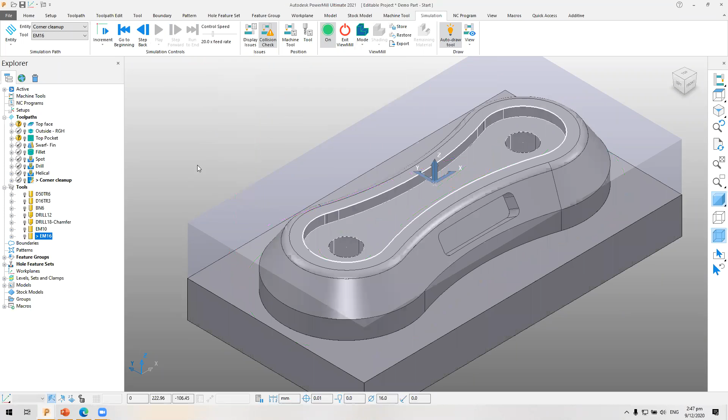Okay, so how do I go about doing this? Well, the first thing I need to do is to create some coordinate systems in order to tilt the tool over to be able to get into these pockets. Now, PowerMill has a really slick way of doing this. So again, if I come up to my feature group, the same trick that we pulled on this top pocket, I'm going to use my feature recognition.

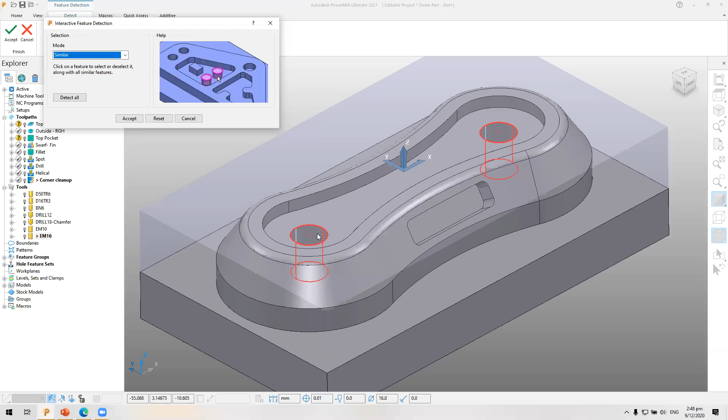But this time, instead of selecting single feature, I'm going to select similar. This allows the system to pick other instances of similar features on the model. So, for example, if I hover over the drill holes, it picks up both of them. But we can do the same thing on these side pockets here as they're similar to each other. Press accept. So I've now defined those as features. I come down here in my feature group, and can see numbers 2 and 3.

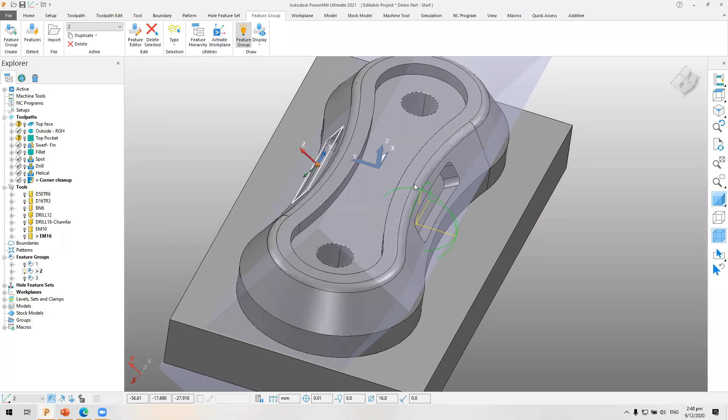They're both there. So now all I need to do to create my coordinate system is just come up to my taskbar here, select activate workplane. And we've run into a little bit of an issue. Something I forgot to do at the start. By default, the block is always linked in PowerMill to the active workplane. So when we've moved the active workplane, it's also moved our block, not what we wanted.

So all I need to do to correct that is just pick an operation so it moves back to where it was. Come back to my home tab, come into our block. And now under our coordinate system, where we had it set at active workplane, I'm now going to set that to global transform. So if you make mistakes like this right at the beginning, it's not an issue. You can come back and modify them later in the build. It's not a case of once they're set, they're set. You're free to manipulate them whenever you like.

Press accept. And now when I activate that, the block should stay where it is. There we go. Let's close all this down. So I can pull the same trick on the other side. Feature group, activate workplane, and we can see it's then created our coordinate system in the correct orientation for that pocket.

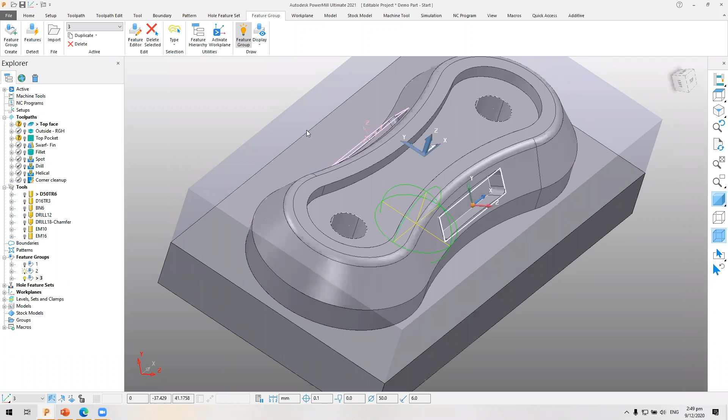All right, so I'm ready to produce these operations now. So again, I come back to my home tab, come into my database, and now I'm going to need to select another tool to fit into these corners here. And I'm not sure exactly what the radius is of these corners. So again, I'm going to come back to my measure command, select diameter. If I just hover over this, 6.42. Nice to give us a nice round number. So I'll just press escape there.

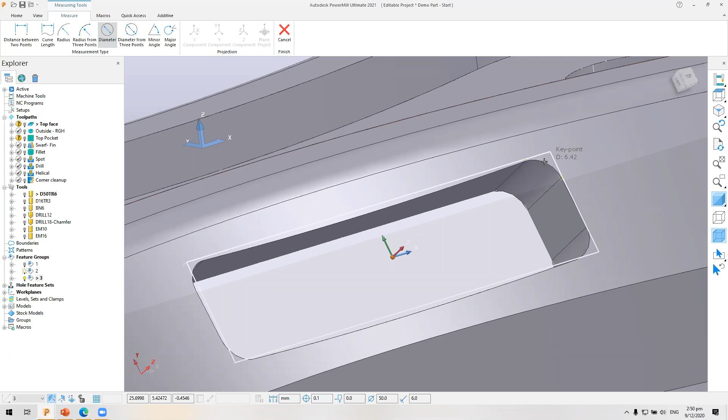So under our end mill, I'll pick, say, a 6mm end mill. Create that tool. Close that down. And once again, create a new toolpath. Come into feature machining, feature area clearance. The same trick as we pulled before. Come in here, give this a name, call it, say, pocket 1.

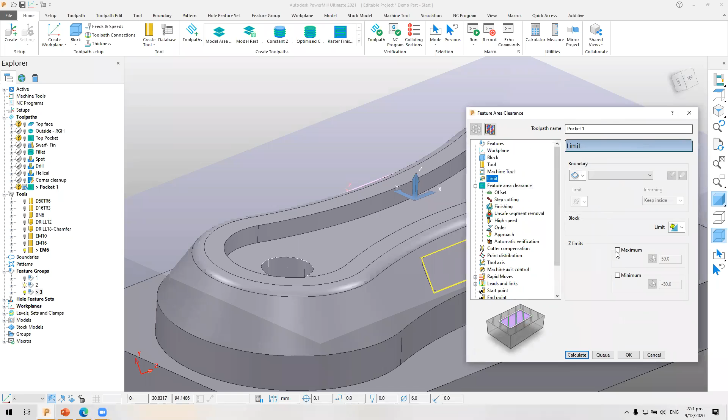And I appreciate we're running a little bit short of time, and I do want to leave some time for questions and answers at the end. So I'm going to be a little bit crude with this. I'm just going to say finish it in one operation. Come in here, change my stepover to, say, 3mm. I'm going to set my limits. We want to limit the toolpath so it's only being produced below where our coordinate system is. So I'm going to set that to, say, 0.

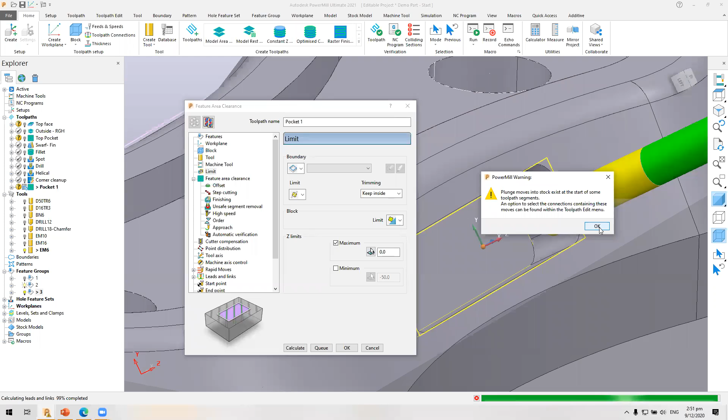Calculate. And the system comes up with a warning at this point. What it's actually done is it's assessed the toolpath that we've created, and it said, hey, at some point during this toolpath, you're going to be plunging the tool directly into the material. So that's telling us we've got a bit of a problem there. So I'm going to press OK, and I'm going to come down to my leads and links.

And this time, for my lead in, I'm going to select ramp, calculate that again. And now we can actually see we're going to be ramping into this pocket, and that error message has now gone away. So the system, as I said, does a lot of thinking for us in the background. And if it looks at something we're doing and says, hey, this could potentially be dangerous, it's going to flag up a warning for us.

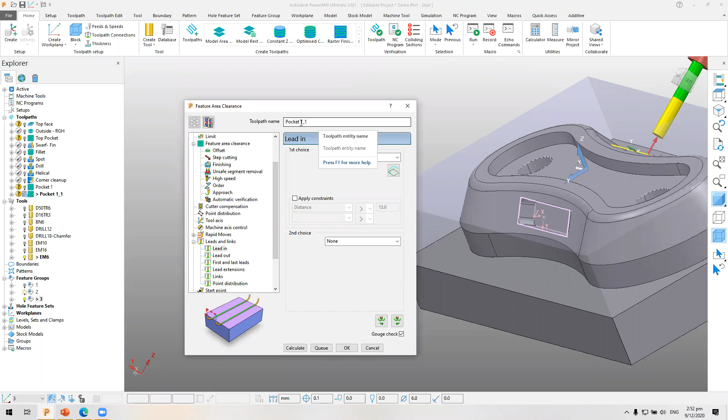Okay, so pretty happy with that. So the next thing I want to do is to produce essentially the same operation, but on the other side of this part. So again, we're going to pull the same trick as we pulled with our drilling. I'm going to say, give me a copy of this toolpath. Name this one, say, pocket 2. And now under features, I'm just going to switch to the opposite side, switch my work plane as well, calculate that,

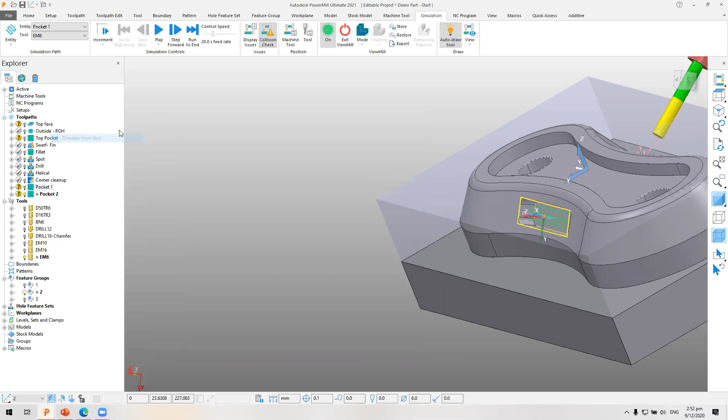and there we go. So we'll just run those 2 last operations through. Let me bring up an isometric view so we can see what we're doing. So there we go, and the very last one. Okay, so that completes our component.

The last thing I want to do is actually to produce an NC program so we can actually send this out to the machine. So under my Explorer, NC programs, I'm going to select create new program. Again, give this a name. I'm just going to call it, say, 1001. It then asks us for a machine option file, which is essentially a post processor. So this is what actually takes all the pretty pictures that we see within PowerMill and gives us some G code that we can send out to the machine.

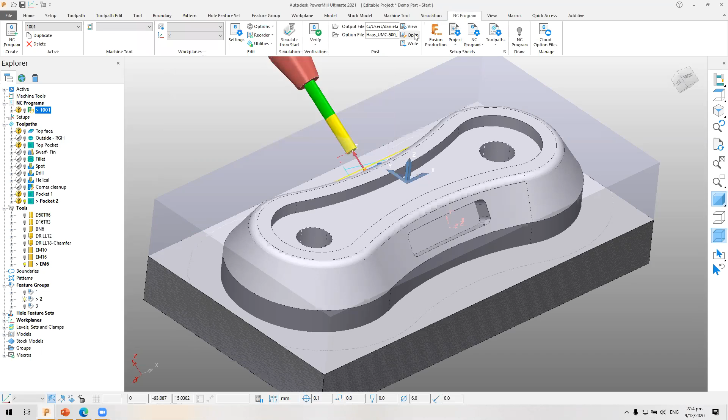So I'm going to pick, say, I've got a Haas UMC 500 post here, accept that, close that down. And now I just need to add all these operations. So I'm going to select them all, right click, add to NC program, and then we can say write. And the system goes off and it writes all that code in the background for us. Last thing to do, just want to view that code. So I come over to my NC program tab, I can say open. It's going to open our code in the external editor.

So that completes the demonstration for today, guys. I appreciate that was quite a kind of high level overview. We didn't have an awful lot of time.